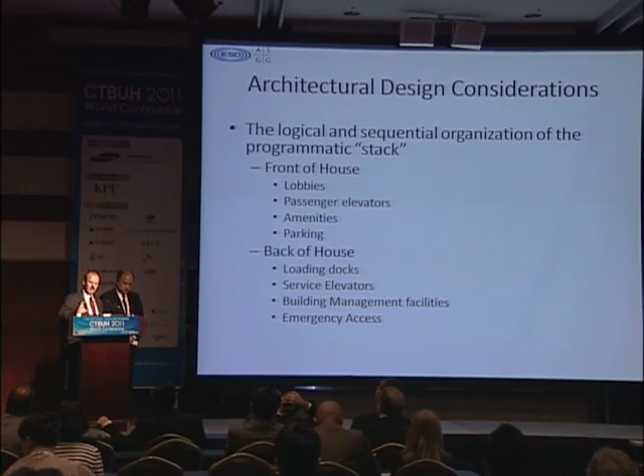In the buildings we're going to talk about, especially Trump, it exemplifies what's called a mixed-use project, with several different types of occupancy, separated generally by mechanical rooms or structural outriggers or breaks in the program that allow for partial occupancy of the tower.

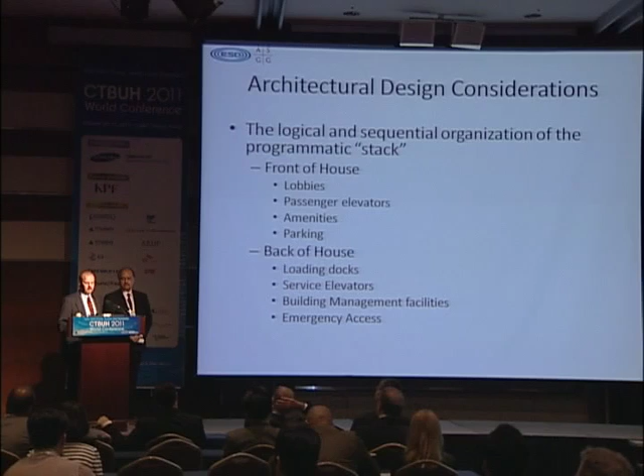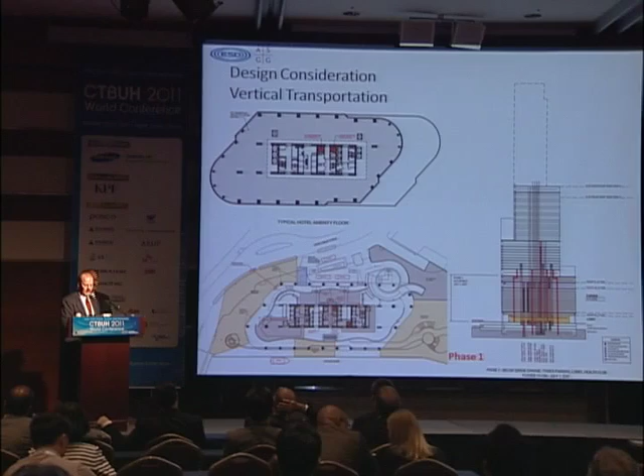It's important to keep in mind that there will be certain front of house and back of house activities that all have to function properly, both from the public standpoint, the management standpoint, and the local authorities' standpoint. So we're going to start with some of the design considerations in Trump Tower, which was formally completed in June of 2009.

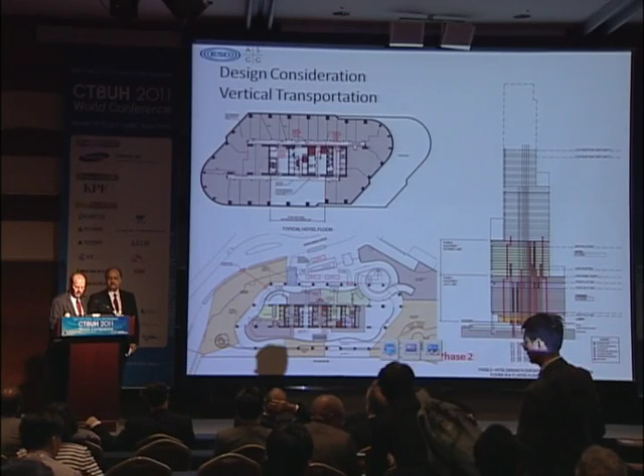However, the partial occupancy actually started in about October of 2007 with what was called phase one. No, I guess I'm at phase two here, let's go to phase one. Phase one included the garage areas and the hotel amenity areas.

A little bit of an overview: the building itself is about 92 stories tall. It has a garage and hotel, which includes hotel amenities - kind of a hotel condo-tel kind of arrangement, but let's call it a hotel. And then there are 3 groups of apartments in the tower above to complete the 92 stories.

It has an interesting location because it's located on the Chicago River, and right adjacent to it was a viaduct that actually had to be rebuilt - that's the area to the left in the beige color. So what you're seeing on the screen now is a plan of the base of the building.

Okay, let's see if I can do this. Okay, here's the tower in plan. Here's the core, and here are the surrounding streets.

Phase one, which included the occupation of the garage and some of the hotel amenities up to about level 16, I think it was, occurred in about October of 2007. Construction started, I want to say, in September of 2004 or so. So this was in fairly short order.

The important thing about any phase of advanced occupancy is that the building - the public parts, the occupied parts of the building - should function seamlessly.

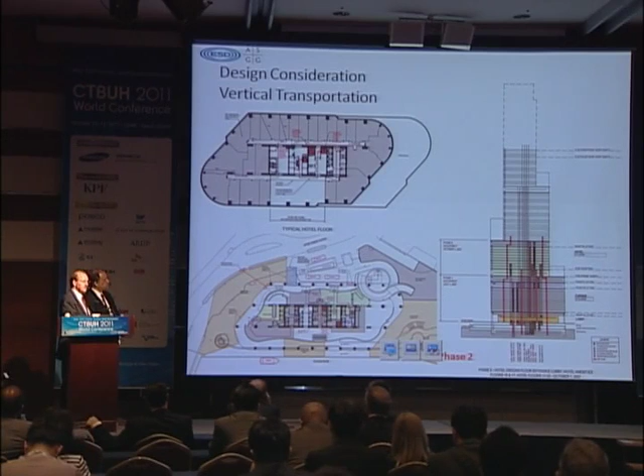And again, important thing, remember the rest of the building is not there. So from a life safety standpoint, it means that they're still doing picks. They're hoisting. They're actually constructing the slabs at that level over basically an active building. So a crash deck was built in to protect the public getting to the building through the lobbies, et cetera.

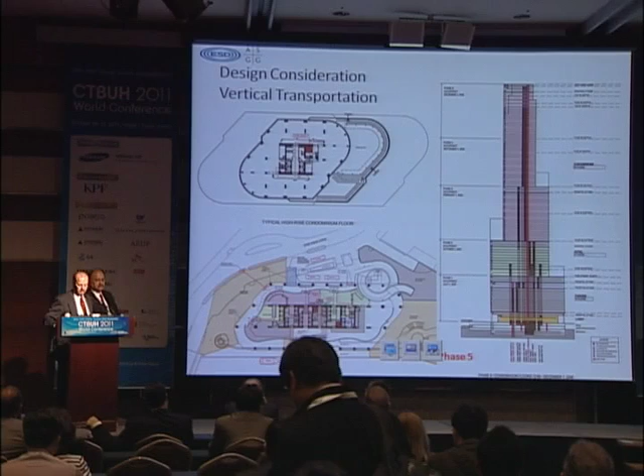Phases three, four and five really were done over a period of about a year. From June of 2008 until June of 2009, the residential portions were opened in 3 phases. And of course, it was only at that last phase that all of the vertical transportation elements were in place, so that the fireman's elevator finally became the permanent fireman's elevator. All the stairs were active. Not that they weren't active before, but there no longer needed to be buffers between the areas under construction and the areas that were occupied.

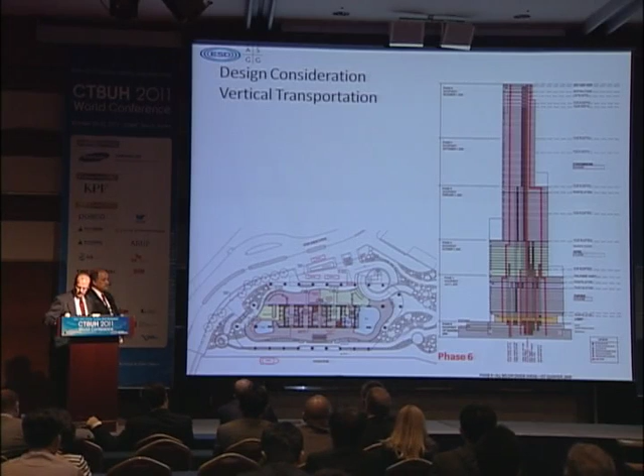I think I'd like to talk a little bit about the logistics of the site. Do you want to take over at this point? Then I'll give you this.

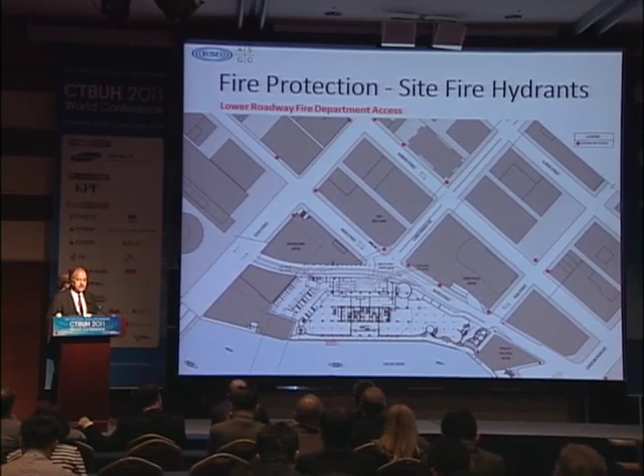The site logistics was very important, not only for the project itself, but also for the city officials and firefighters. So this diagram here indicates all the fire hydrants that are nearby at the lower level of the project that had to be identified and clearly understood by not only the design team, but also the contractors and operators during the construction phase, to make sure that all those are accessible and usable during the construction process.

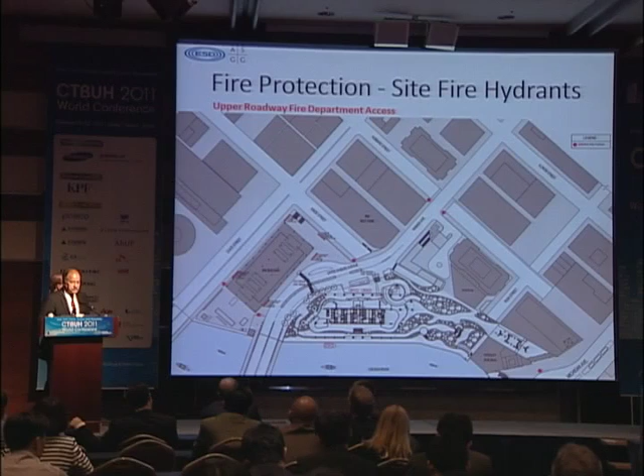One thing also to notice, this project had 2 levels, a lower level and an upper level. There was a viaduct here that needed to be constructed during the construction. So there was a portion of the roadway that was also blocked off that had to be not only planned for, but also discussed with the city officials to make sure that the planning can take place and awareness is there during emergencies and any conditions that may arise.

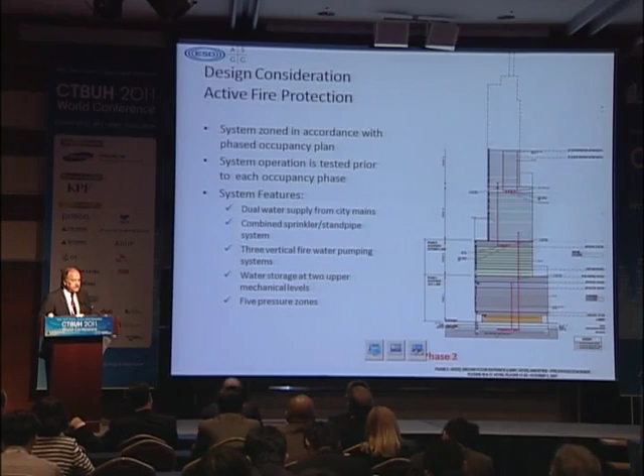From the system standpoint, as Peter indicated earlier, the same concept was followed throughout for all the active systems. In this case, the active fire protection system had to be zoned in accordance with the occupancy and planned so that a portion of it, as the phases were built up, could be tested, monitored and operated for that particular phase, independent from the rest of the building. As the building was constructed further, those new systems would come online and be integrated with the prior construction, and again had to be tested for that phase to make sure that the system operates properly.

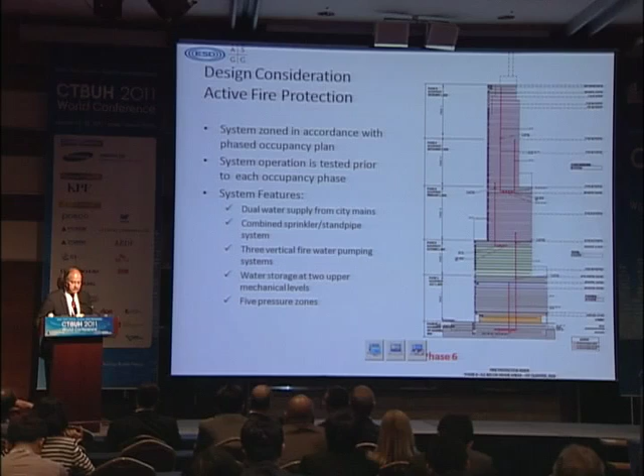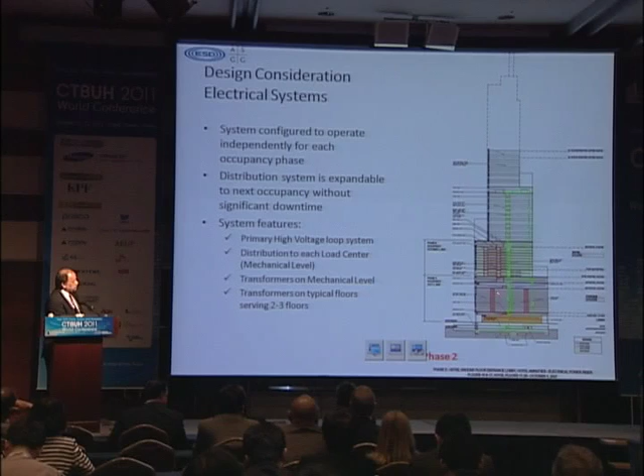On the electrical side, the same configuration had to be considered here. This building has a high voltage riser, which was a looped system. As you can see here on this diagram, the main incoming services were from 2 different directions to the main, these green lines, and then built up to the first zone as a loop, and then extended to each one of these zones independently. So you basically had a small city vertically built that could be operated and used independent from the rest of it. Again, we talked about expandability and a configuration of the system that adapts itself to the construction process and is coordinated with that configuration.

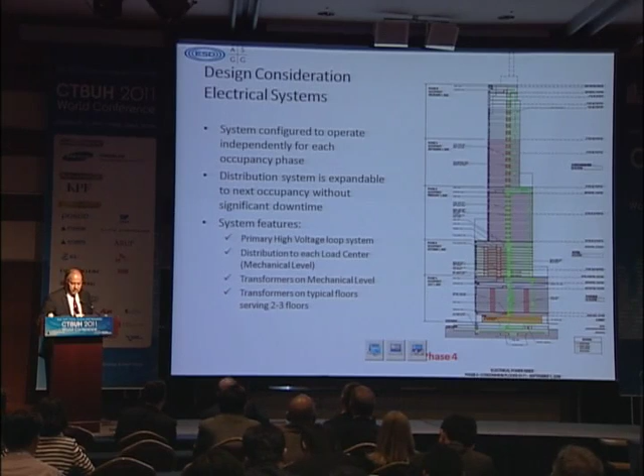On the emergency side, emergency power was, again, powered in the same configuration as the rest of the systems. We had low voltage generators that were at the base, and they were located directly below the ramp, because the ramp for the parking garage was supposed to be built first. That part of the construction was done, and it was away from the rest of the logistics, the material movement, so the emergency generators were operational during the first phase, and they could feed the lower zone and then expand up independently from one another from the load centers up and down to serve each occupancy area.

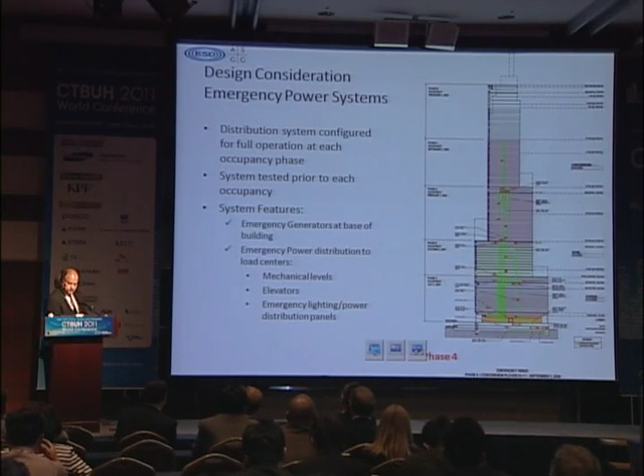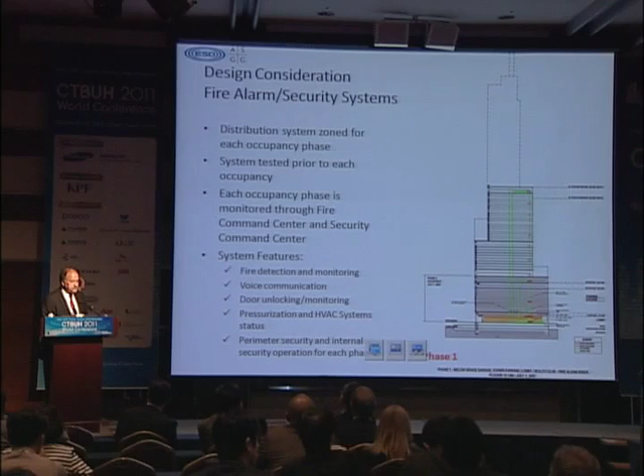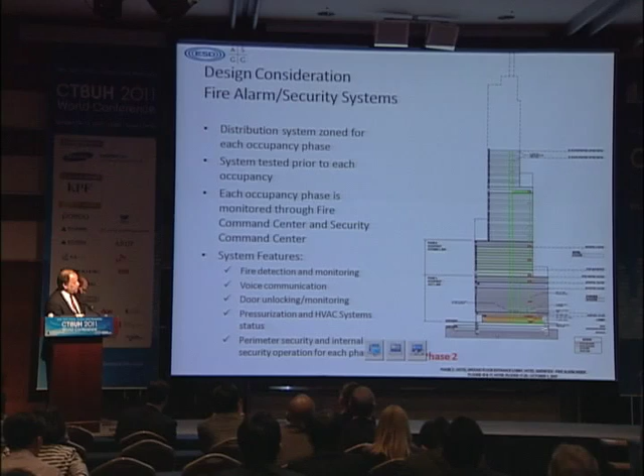Let's see, emergency power. Fire life safety was a very essential component of the project. It had to be tested not only by the operations for the building, but also needed to be monitored by the Chicago Fire Department to accommodate any emergencies that need to be attended to. The command center was located at the lobby level, and that had to be built and constructed initially and expanded during each one of these phases to accommodate the new areas of the buildings that are coming online for occupancy.

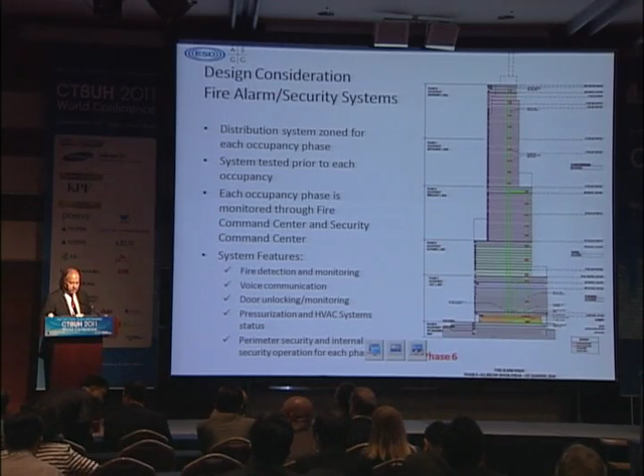So it was essential to zone the system appropriately so it can be constructed, run, tested, and monitored independent from the rest of it, and have a very short downtime between the time when you switch to new occupancies. As you know, fire and life safety systems require dedicated monitoring and integration with the building operation and security.

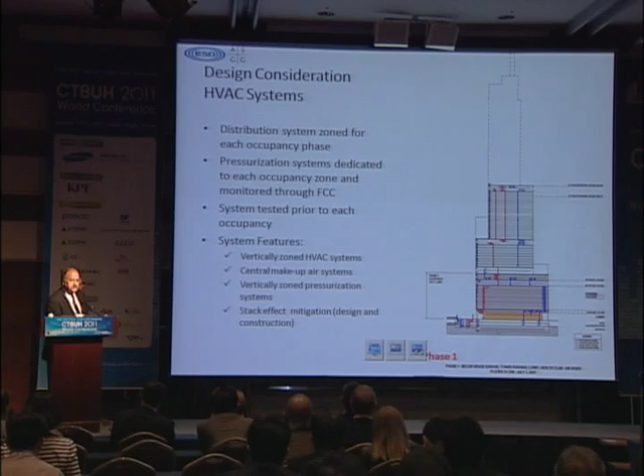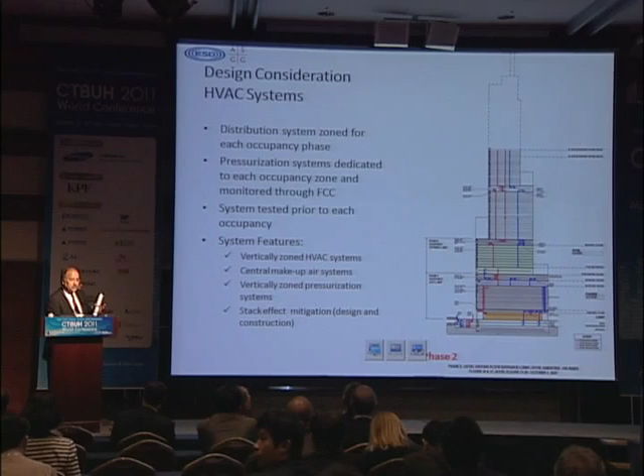Similarly, the HVAC system, again, had to be zoned in accordance with the occupancy. This first phase was the parking. You can see here, these are actually floor-by-floor systems. They were very independent from the rest of it with the lobby and amenities. And then as you go up to upper levels, those become more centrally located to feed down or up, depending on what the zone was, and follow the same concept as the rest of the system.

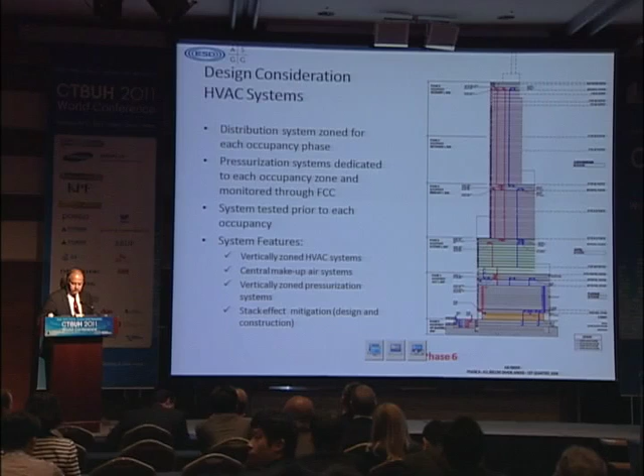These are some of the diagrams for material handling for construction. Again, these had to be planned and defined and reviewed by the building department and fire department to make sure that everybody's on board and everybody understands what the process is, and if there's a case of emergency, they would be able to access the project.

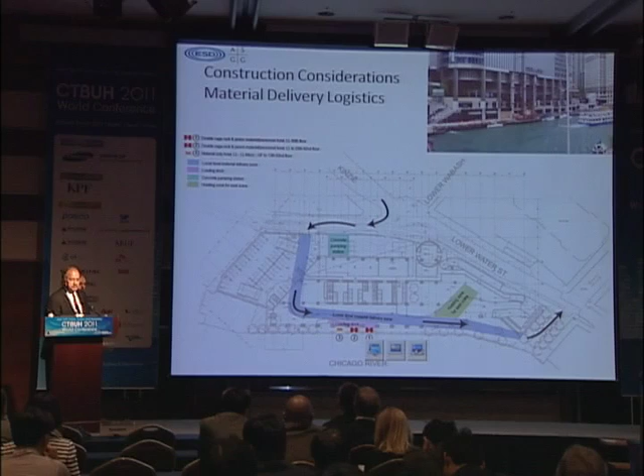So you can see here the material for the project was routed to come back and come actually on the river side and go out. So the frontage of the building for access for fire trucks would be left alone and left open for all the operations. The hoist was on the riverside for material hoisting. You can see here on the construction photo how it was planned. And also there was a staging area here and also on the upper levels.

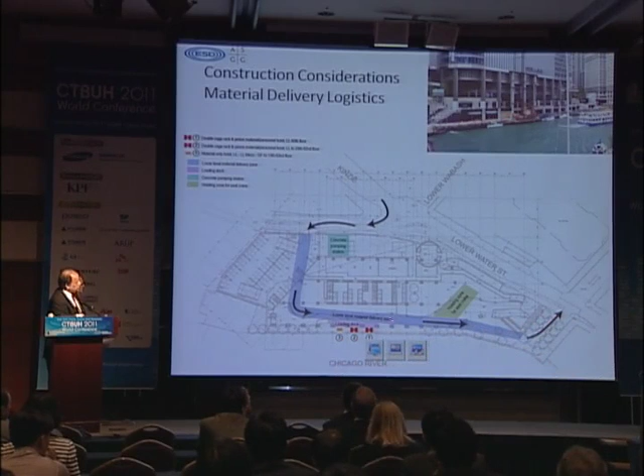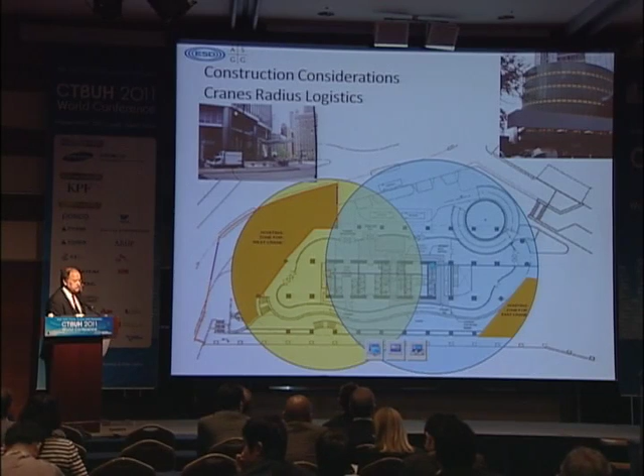This diagram shows the radius for the coverage for the crane. The material hoisting was located here at this zone and also this area. This coincided with the roadway that was being built here, so they could easily fence that out and logistically operate that. You'll see this ramp that was built here, but the crane covered that, so there's protection that had to be provided there for the people to get into the occupancy of the building.

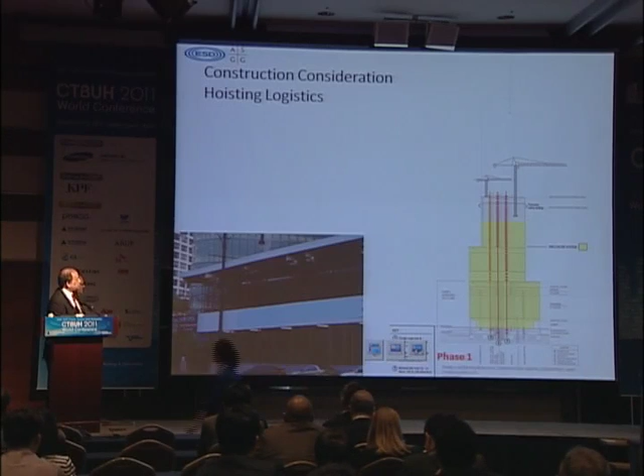This is a diagram of the first phase. You can see what part of the building is operational. Parking, essentially, you can actually see here has a sign, parking is open. This was the first phase. There was still a crane at the top of the building. On the rest of the process, you can see the diagrams for the...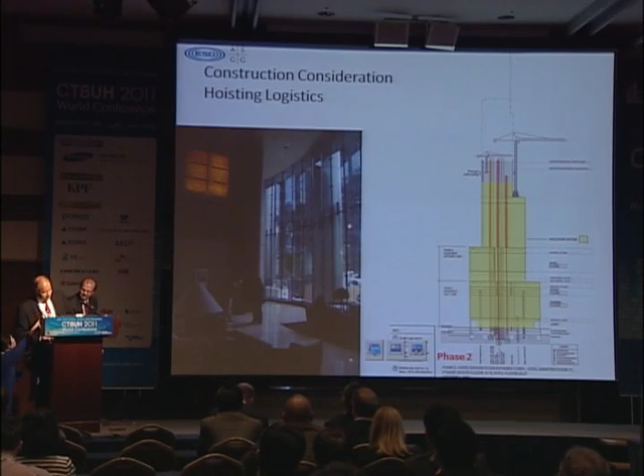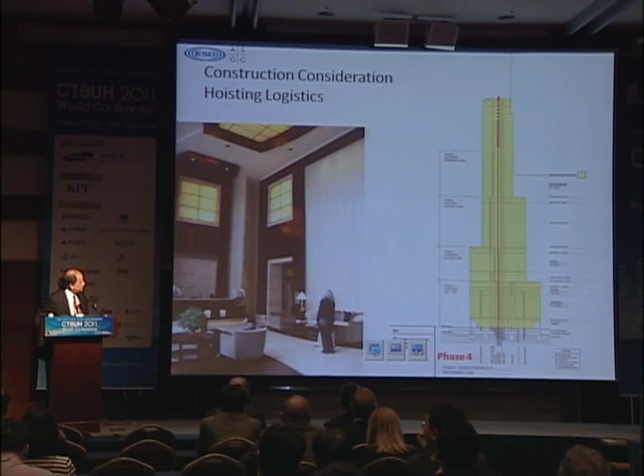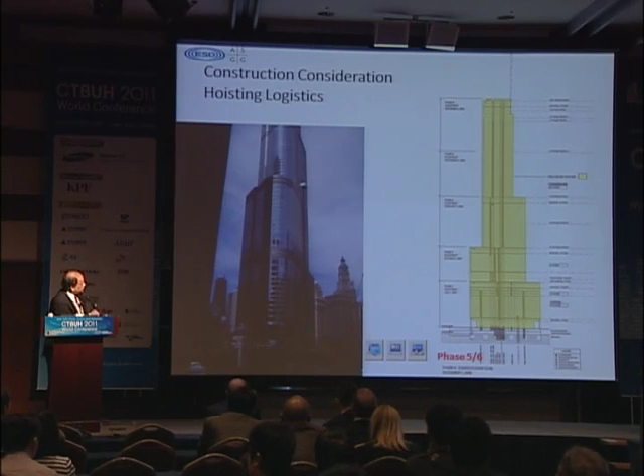These are, again, some of the diagrams for the overall construction that are coordinated with the achievement of the hoisting and everything else. Hoists are removed here, cranes. You can see the area for the hoisting that was identified to accommodate the material to the upper levels of the building.

Yeah. What you're going to see now is just a 2-minute video that was prepared for a competition that we successfully completed in Jeddah, Saudi Arabia.

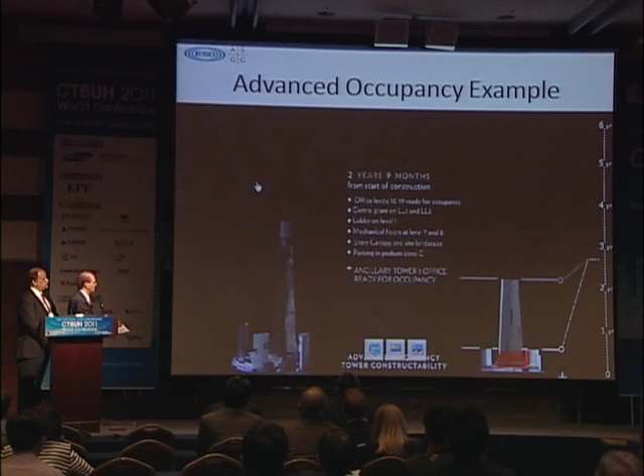And it shows the concept of advanced occupancy not only brought to a particular project, but also to a district. The competition was for the next world's tallest building, and surrounding it were 5 properties that were also part of the original design. And so we established, with some work on logistics, a way of organizing the site so that portions of it can be completed in plan, as well as organizing the building so that portions of it could be completed in section. So it was kind of a 3-dimensional advanced occupancy, so that not only can portions of the tower be completed, but the surrounding towers could be completed within a certain amount of time.

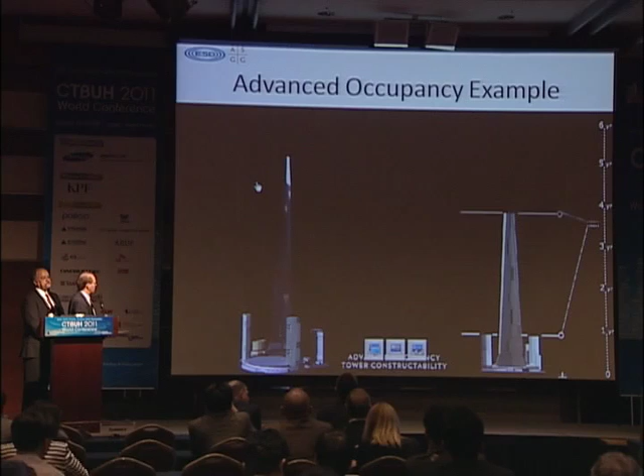So 3 years, 6 months from the start, we actually would have completed a hotel and service apartments adjacent to the tower, amenities concourse, and have completed and occupied up to about level 46 in the tower itself. Meanwhile, the tower is continuing construction. Of course, as it gets higher and it gets smaller, it goes more quickly. But still, occupancy at 4 years, 9 months would have been up to the top of basically residential group 3, which is about at level 103.

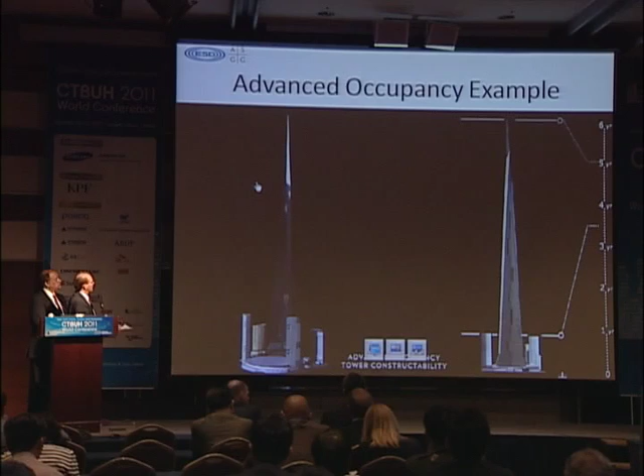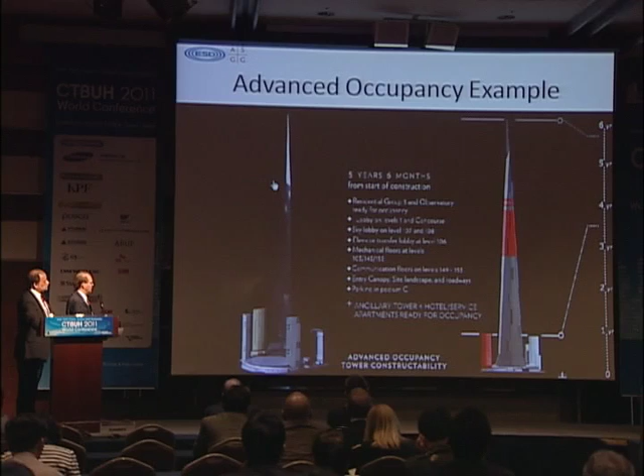And then by the time the total building was completed and everything occupied, about 5 years, 6 months, the surrounding buildings, which are much smaller and much simpler, would have been bringing revenue in for over 1.5 years. Making the economic viability of the project a lot more attractive. You don't have to wait 6 years or 5.5 years to get any income back on your investment. And that's what this diagram basically shows.

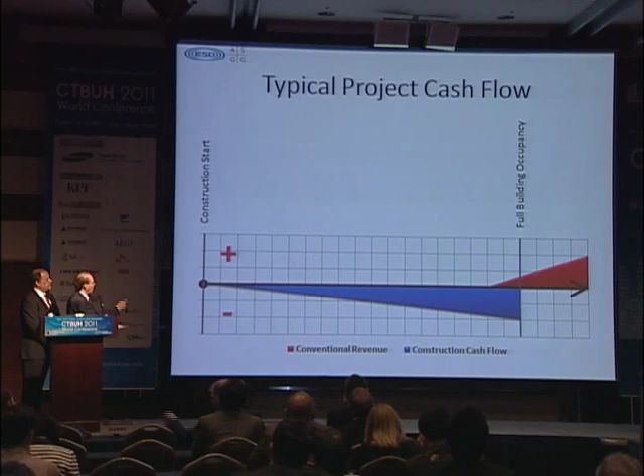Conventionally, you would be spending a lot of money, and that's the blue line below the line. That's how much money the owner is investing in the project, only to start to get revenue there in the red at the end. By moving that up, by starting to occupy phases of the work or parts of the project, you can bring that revenue to an earlier stage. And these are, I think, 3-month increments.

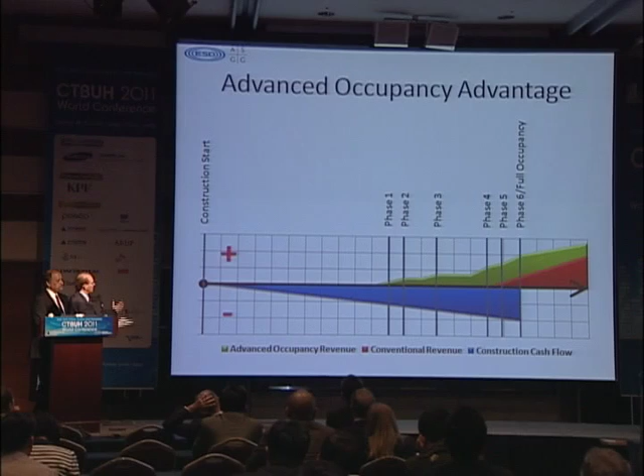And this more or less shows what happened on Trump, where the garage revenue is followed by the hotel revenue, then is followed by the 3 groups of residential revenue. So you can see, take the red and the green, you combine it together, you certainly are reducing the carrying costs of what can be a very high price. So I think that's it.

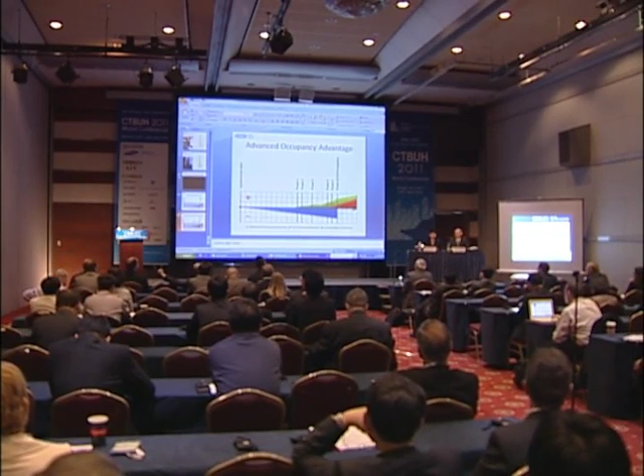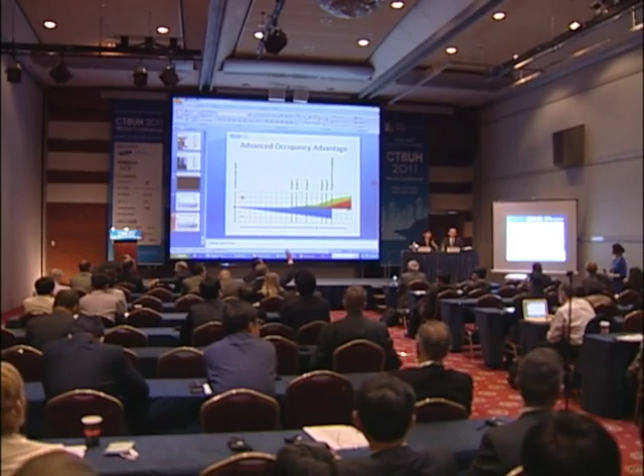Yes, my name is Peter de Jong. I'm very much interested in the cost part, so thank you for leaving this slide in front. Oh, there it's gone again. I didn't do it. The additional revenues are impressive, but can you give also a ratio about the additional costs for the advanced occupancy? Well, that's a good question.

And it wasn't so much in material costs, it was maybe in management costs, but I think Trump will say it didn't really cost anything. We just put the process in a way that allowed the natural, again, you go back to the very start. If you organize the building in a certain way, and these tall buildings almost are, Trump is like 3 or 4 30-story buildings stacked one on another. So they really are designed so that they can be run autonomously. And so it really was taking that kind of happy circumstance and being able to take advantage of it by running the hotel section autonomously, and then running at least the lowest range of apartments autonomously.

I think the revenues that were generated from the early occupancy by far exceeded what the incremental cost of the operation would be. Obviously, you have to mobilize your building operations early, but you also have a revenue that goes against that. So from a cost of construction, it really didn't change anything. It actually made it simpler because we thought about it and organized the systems in a way that they can run, test them, and operate them, and then add to it as they go along. They had to do that at the end of the project anyway. This actually simplifies it because you're doing them in smaller increments over the life of the construction.